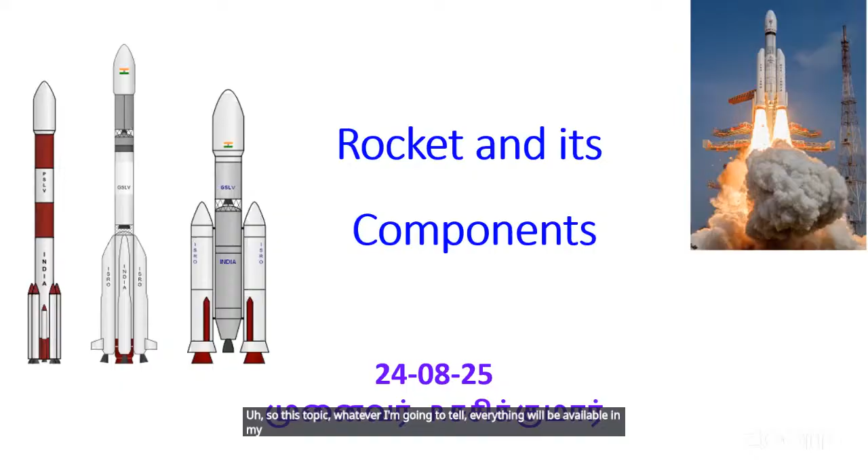Some two or three days back, he called me and asked, "Why can't you give one talk about rockets and its components?" I had some official engagements, then he said evening is also okay, so today 6 p.m. was fixed. As told, I have written almost 25 books in Tamil, 12 of them available in English, totally 40 books plus now, with a few in Malayalam and Kannada also. Whatever I am going to tell is available in my books in a very detailed way. So now we will learn about the components of a rocket.

Before that, we will understand some basic history and basic science behind rockets. So what is the principle of a rocket? Everybody studied Newton's third law of motion: for every action, there is an equal and opposite reaction. If you fill a balloon with air and then release its mouth, the air coming out creates a reaction force that moves the balloon. It moves in whatever direction you keep it.

Suppose you tie a rope between two points, put a straw on the rope and attach the balloon to it; the balloon will move in the direction the rope is tied. That is the concept. Similarly, if you burn a fuel and the exhaust gases are thrown out through a small opening called a nozzle, it creates a force, a thrust that pushes the rocket. That is the concept. There are liquid engines, solid engines, and so many things.

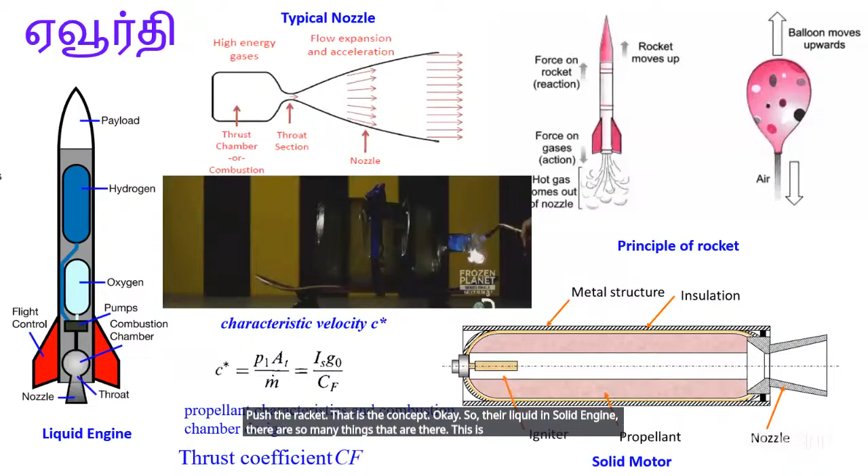This is the basic concept of rocket. In this line only we are going to study. So once I told fuel, there are different types of fuel available. Whatever we are extracting from the crude oil, all we call as a fuel.

Before this rocket story, there is a small history behind this. In the 19th century only, we found the crude oil. In the middle of the 19th century, we found how to extract different things from the crude oil. Those days, before petrol and diesel engines were discovered, people were using this crude oil to get only kerosene, and they were using kerosene lamps. That was the main purpose of this crude oil.

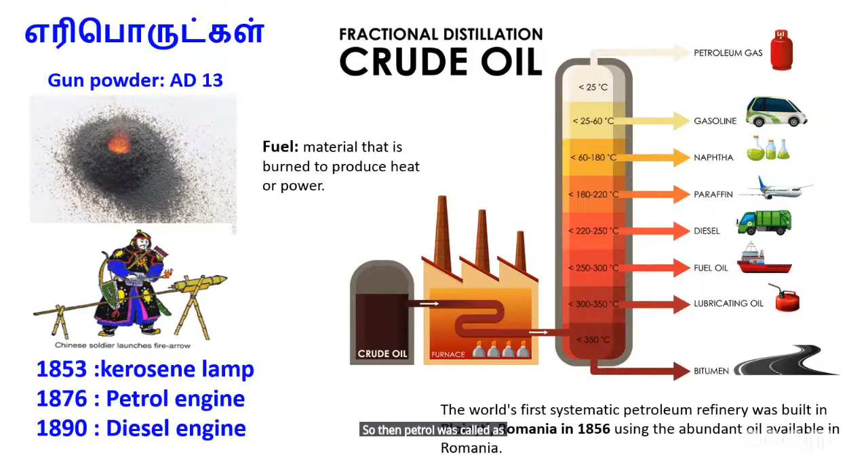Later they found the petrol engine in 1876 and the diesel engine in 1890, and it was a great opportunity for the crude oil extraction and the distillation of this crude oil. Then petrol was called black gold. From that day onwards, development started in all areas: how to use this energy, both petrol and diesel, and how to build very strong engines.

So we know that all are fuel, all are energy. Suppose you take two idlis in the morning, you get some fuel. If you take one chocolate, you also get energy. Each fuel has a different energy. For example, if you eat 1 kilo of Dairy Milk chocolate, you will get 22 megajoules. If you take 1 kg of banana, you will get only 4 to 5 megajoules of energy.

Rice also 5 megajoules. But the human body requires 10 megajoules per day, or in kilocalories, something like 2500 kilocalories. Like that, each propellant, each fuel we use, like coal, coke, or LPG, will give some energy. When the rocket uses this energy and converts it into kinetic energy, we will not get all the energy. When you fire the fuel, you get the exhaust gases.

This exhaust gas will be traveling through a... okay, my mouse is visible.

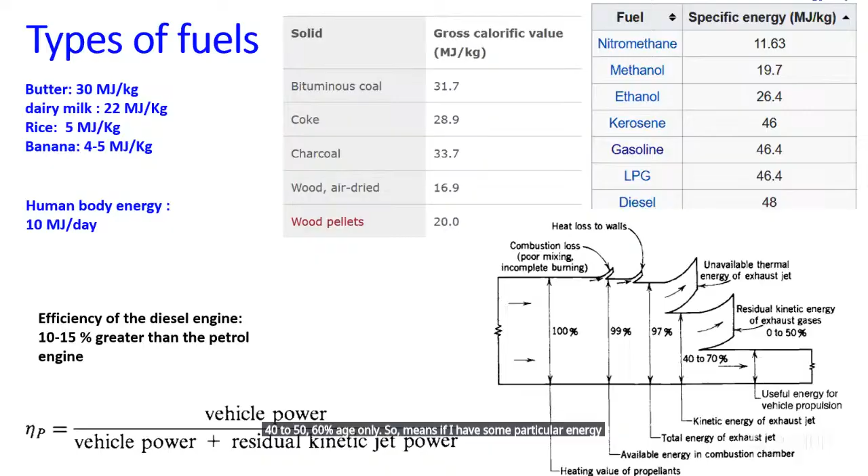Yeah, traveling through the nozzle. When it travels, some of the energy will be absorbed by heat losses to the walls. Before that, there will be combustion losses, that is poor mixing and incomplete burning. Then there will be unavailable thermal energy in the exhaust gas, so we will not get the full thermal energy. Then residual kinetic energy passes through. So effectively we will get only 40 to 70 percent. It means if I have some particular energy in my propellant, when it comes out, I will get hardly half of the energy.

But before that, what is fuel? What is propellant? That differentiation we should understand. To understand that, we will take the example of our aeroplane. An aeroplane travels in the air regime. If you go above the earth, till 30 kilometers altitude, 90 percent of the air is there. 99.9 percent of the air will be below 70 kilometers. If you cross 100 kilometers, it is called the Kármán line, where space starts.

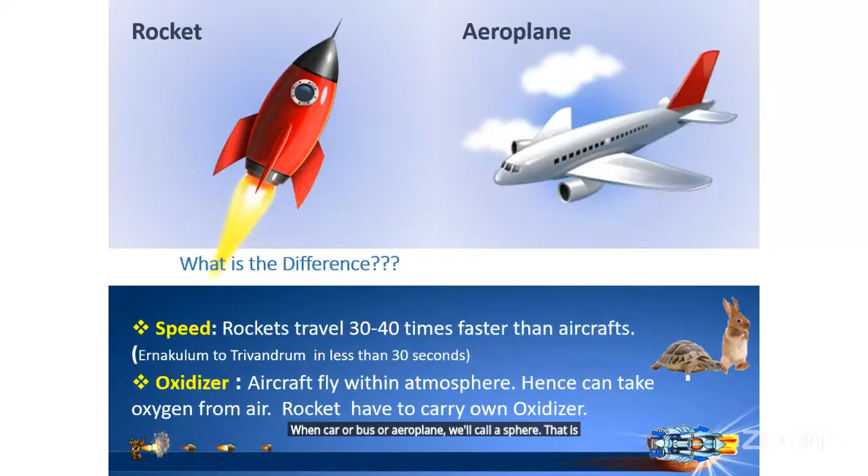So when you go out of air, into space, there is no air there. To burn any fuel, we need oxygen. So if the rocket goes out of the air regime into space, to fire the rocket fuel, we need oxygen. This fuel plus oxygen combination we call a propellant. For a rocket we call it a propellant; for a car, bus or aeroplane we call it a fuel. That is the difference. So when a rocket goes, along with the fuel it has to take oxidizer also. That is the message.

So come to our old story. Immediately petrol engine and diesel engine came. At that time the Wright brothers also started thinking of how to use this petrol engine and try to fly. So they designed the engine in 1903. The Wright brothers' engine was basically a petrol engine. With the help of that engine they were flying.

Later there was a gentleman called Robert Goddard, an American engineer. He also was trying to make a rocket using gasoline. In 1926 he made a rocket using this gasoline, the first rocket, which happened to be a liquid engine rocket. This liquid engine rocket rose almost 41 feet and traveled a total of 184 feet in 2.5 seconds. This is the first discovery of the flying rocket concept.

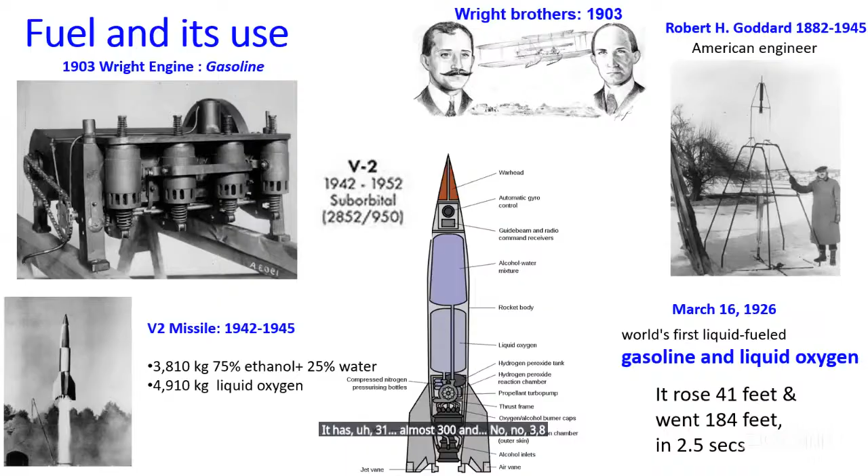Then the Second World War started in 1939. At that time Hitler thought they had to build a powerful rocket, so he made the V2 missile. That missile had a bigger capacity, traveling something like 300 kilometers plus. It had almost 3,800 kg of fuel as well as 4,900 kg of oxidizer. So the story goes like this.

During this period, before Goddard found this rocket, there is parallelly some more history happening. One is a famous person called Hermann Oberth. He originally proposed that when we want to fire a rocket, it has to go from Earth to some other planet. How do we have to fire it?

When we are near to the Earth, the rocket will be moving at higher speed. When it is away from the Earth, it will be moving at slower speed. So at slower speed, when you fire, we will not get higher energy. When we come near to the Earth - apogee, perigee - if we add the additional velocity, since half mv squared, we will get extra energy. This is what Oberth found.

But anyway, that was his PhD, and his PhD was not accepted in those days. In 1922 when he was telling this concept, people were unable to imagine it. His students only later developed the powerful rocket like the Saturn rocket, which took man to the moon. One of his students is Von Braun.

Wernher von Braun was originally in the German team developing the V2 missile. Later he moved to America for developing rockets.

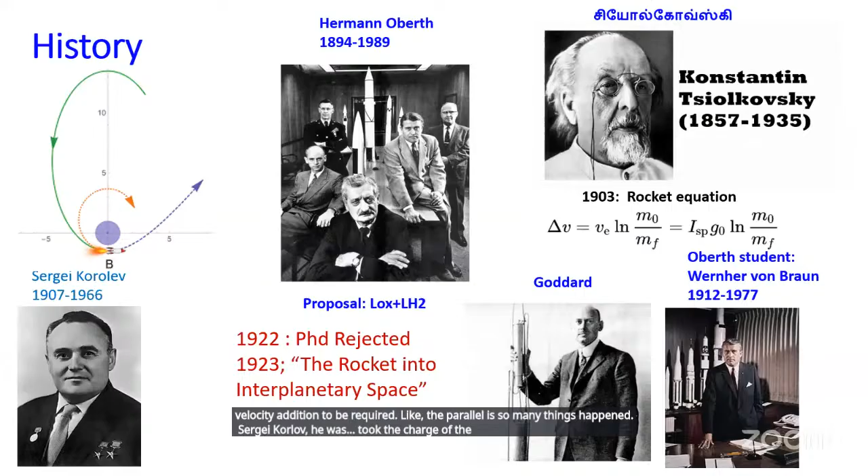Parallelly during this time, Tsiolkovsky found the rocket equation, showing how much velocity addition is required at each stage. So many things happened in parallel. Sergei Korolev took charge of the Russian space mission, so parallelly the rocket development was going on.

With this history, we will go to the rocket components. The first thing, as I already told, is we need a propellant. When fuel plus oxidizer is there, this combination is called a propellant. So a rocket has a propellant - to burn the fuel, we need oxidizer, and the rocket carries both things. Up to that, you may be clear.

So what is propellant - there are two types of propellant used in a rocket: one is liquid, the other is solid. Gaseous fuel, when highly pressurized and at low temperature, will be converted into liquid. So we can call it liquid and solid propellant.

Typical liquid propellants can be earth-storable. What does earth-storable mean? Take petrol - petrol is filled in a normal two-wheeler tank or car tank. We are not keeping any specified temperature limit; it can be stored at normal room temperature. These types of things are called earth-storable propellant: hydrogen peroxide, nitric acid, nitrogen tetroxide, everything.

So here both fuel and oxidizer will be stored here.

The second is cryogenic propellant. Cryogenic means when the fuel is stored at a temperature between minus 150 degrees Celsius to minus 273 degrees Celsius, we call it cryogenic propellant, like liquid oxygen and liquid hydrogen. Methane is also one type of propellant, but methane is stored at minus 161. If one is in the semi-cryogenic condition and one is at normal room temperature, then we call it semi-cryogenic. Otherwise it will be called earth-storable or cryogenic.

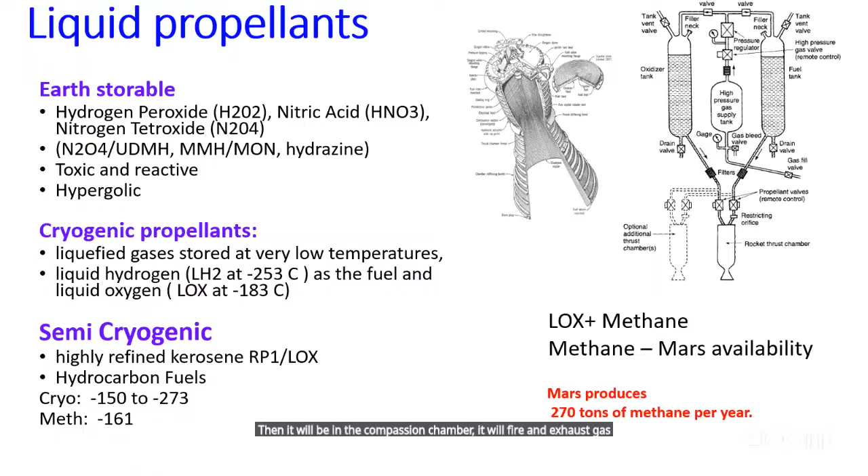If you come to solid propellant, unlike liquid, you have to prepare the fuel. First you take the fuel, then to burn it you need an oxidizer, which provides oxygen during firing. When you mix these two, they have to be joined together, bonded and bound, so a binder is added. Then you decide how fast it should fire, so additives are added for that. Everything is mixed together.

This mix is put in an oven at 60, 70, up to 100 degrees for a few hours, maybe even a few days, until you get a paste. Once mixed, you have to cast it, then heat it again in the oven, and you get a casted motor. So this will be solid.

Sometimes hybrid is also used, meaning fuel may be solid while the oxidizer is liquid. The oxidizer will be fired, touch the solid, and it will fire. But for bigger motors, hybrid has difficulty due to limitations, so we always use either solid or liquid only in larger systems.

This is the concept. What you are seeing here is a picture of the original motor planned in the Saturn rocket to take human beings to the moon. This has a 260-inch diameter solid motor, something like 6 meters. When this motor fires, you can think that 2,800 tons of thrust will be generated. That much powerful motor.

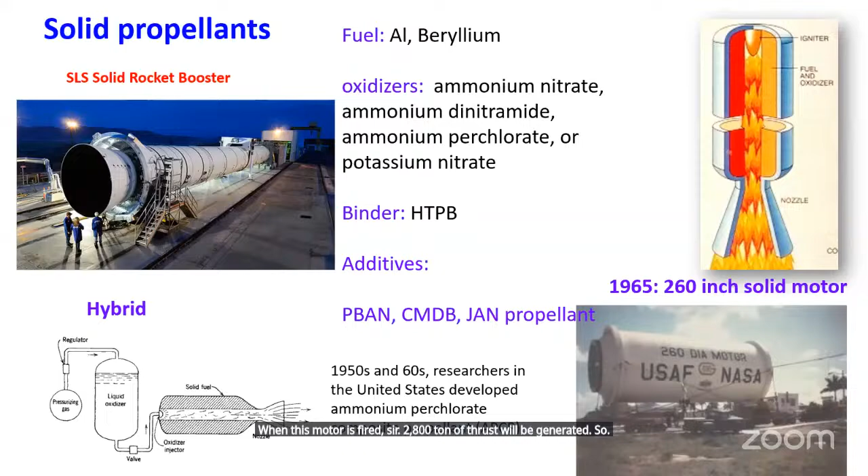Before going into how many components are in a rocket, we'll try to understand how many parts are there in your day-to-day life products.

Hope some of you are noting down what I'm telling with paper and pen. Just look at your pen. How many parts are there in your pen? I took the pen I used yesterday. This is a spring-loaded pen, there will be a spring, a top part, the nib, and the cap which I use to put in my pocket. So I have about 6-7 parts.

If you go to the bill of materials of a simple car, you'll see 5,000 to 20,000 parts. What parts go in there? Parts and inner parts - suppose I have one M8 screw, that screw could be used 10, 20, 30 times, so many parts will be there.

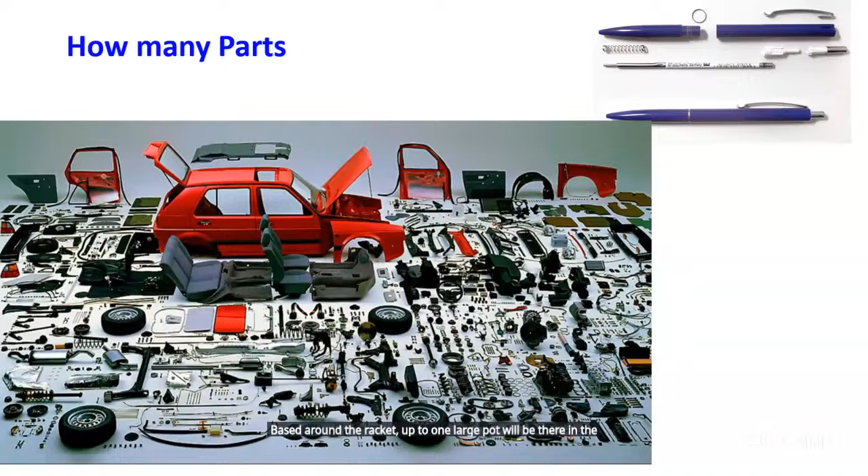In the same line, imagine a rocket - it will have so many parts, everything assembled together, finally connected by wire harnessing. Based on the rocket, up to 1 lakh parts will be there. Smaller rockets have fewer parts; as you go higher, it increases. Solid motors have fewer parts and liquid motors have more.

So then how will you design a rocket? For a rocket, the propellant is most important, consisting of fuel and oxidizer. By firing this propellant, we get exhaust gas, which moves through a nozzle, and due to Newton's law, we get a reaction force that pushes. So the idea is to fill as much fuel as possible in the rocket or rocket stages.

Assume you're going on a long trip, say someone sitting in Chennai going to Bombay or Delhi or Kashmir. One person buys a bag weighing 10 kg, and his luggage - dresses, makeup items, everything together - is only 5 kg. Another person brings a 1 kg cloth bag with the same 5 kg of clothes. So the first person carries 10 kg bag plus 5 kg luggage, totaling 15 kg, while the second person carries only a 1 kg bag.

So 5 kg is clothes, 5 plus 1, 6 kg only. They were taking the same luggage. One fellow taking a 6 kg weight, other fellow taking 15 kg weight. So which is optimal? 15 kg is unnecessary load. For carrying that, you may not carry, you have to ask somebody's help, you have to call labor to lift the item. Even aeroplane, they will charge you more.

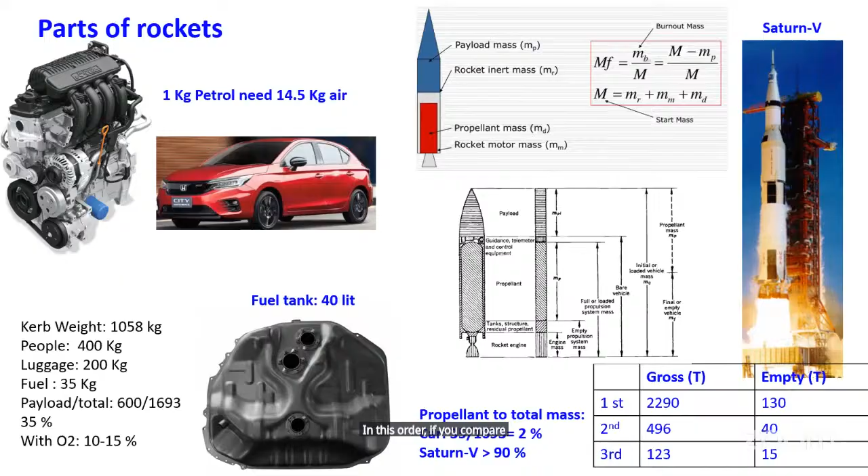But take the same thing for a car. If you take one typical car, the car weight is something like 1058 kg. Here, five people can sit, some 400 kg you can assume, luggage of 200 kg you can put, and 35 kg of fuel I can put. So payload to the total - the total weight will be car weight plus all people, 1693. So total weight it carries is 600. So the efficiency is 35%. Compared to the rocket, it will be still lesser. What I am trying to explain now is payload versus total mass of a rocket.

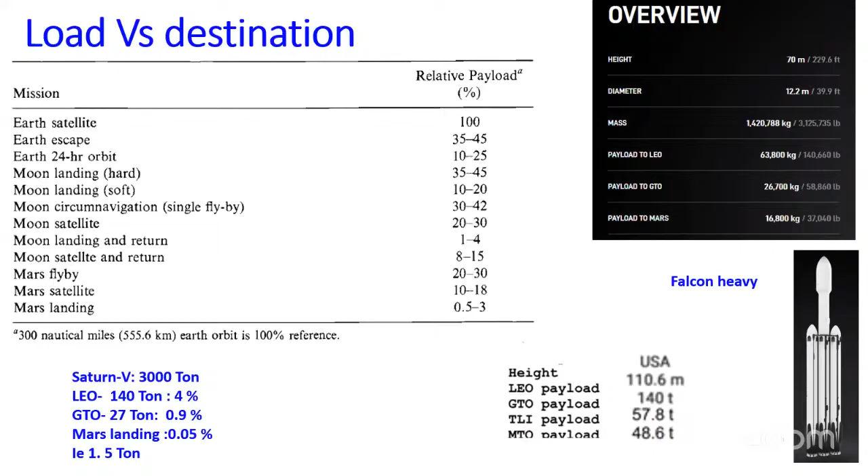So, hope I am audible.

Yes, sir. Okay. So now let's see how the stages are planned. Suppose you are going on a mountain trip and you have to walk for one full day. For that, morning breakfast, lunch, and evening snacks, everything you have to pack separately. Then after packing, you travel to the mountain. When you eat the food, the empty paper or cover will be there. Are we going to take that cover or simply throw it into the dustbin? We can carry it, but then unnecessary load will come. If you stored every chocolate or snack cover from the last 10 or 15 years in your house, it would be a huge load.

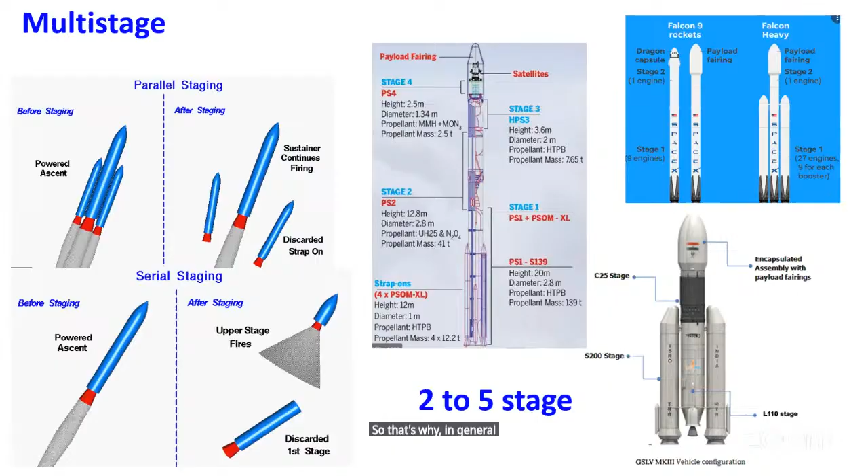Similarly, when a rocket goes up and up, it is designed in multiple stages. Once a stage is over, carrying that stage is an unnecessary burden for the rocket, so that stage will be separated from the main thing. When you separate it, the next stage will take care. Ideally, if my rocket has n stages, say 100 stages, removing each stage after it burns would be an advantage. But there is a practical difficulty: assembling more stages. That's why, in general, rockets have a minimum of 2 stages and a maximum of 5 stages. That is the optimal thing.

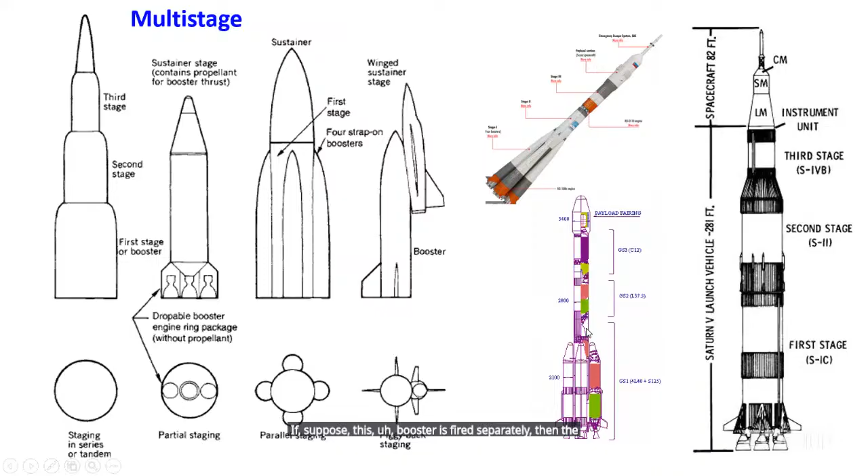Then, how stage numbering is given: you can see the main booster. I have put the same GSLV rocket. To support this main booster, I will give strap-ons. The strap-ons give force to the main booster. When it is put like this, we call the strap-ons the zeroth stage, and the other one we call the main booster. If the booster is fired separately, then the main booster, then it is called first stage, second stage, like that. You can see this in some rockets.

Okay. So now the rocket goes and my stage is burnt. I don't want that stage, so I want to remove the burnt stages. What am I supposed to do? Suppose you are splitting two objects. You are moving in a bus, and before the bus stops, you want to jump from the bus. What will happen? The bus is going at 2-3 kilometer speed, but you and the bus have the same momentum. When you jump, since your body mass is less, you will move ahead of the bus. That is called momentum, mass into velocity. Like when one big ball hits a small ball, the small ball moves faster.

Similarly, in a moving rocket, if you remove the stage, the removed part will travel at a faster speed than the main rocket. It will go and hit it, so this you should avoid. You see here the S200 after separation and how it is done. For that, we give a separation motor, which we call a retro motor.

Okay. So this retro motor will fire in the opposite direction or sideways. It will remove the burnt stages so they are not hitting the main motor. Like the different motors you can see: retro 1, retro 2, separation, like that you can see.

Then the second: suppose you have a water bottle, your bottle is full, then you take one sip. So the top 100 ml is empty. That volume is called ullage volume. When the rocket moves, you will have this ullage volume in the liquid engine.

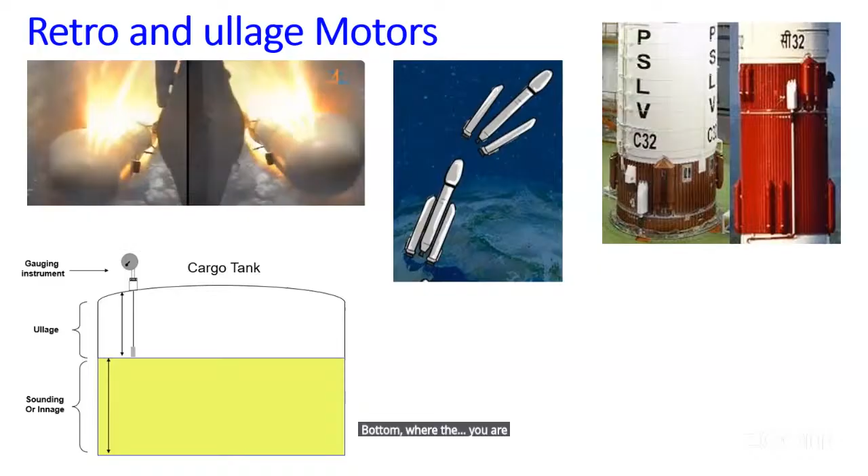So when this particular stage is not firing and some other stage is firing, whatever fuel or oxidizer is there will move upwards due to the rocket movement. So you will have an empty space at the bottom. But prior to firing this particular liquid stage, we have to bring this fuel to the bottom where your engine outlet is connected. So for that you will fire some ullage motor also.

That is also one component. To simply explain once again: there is a fuel and oxidizer, both will be pumped to the combustion chamber. Once it is in the combustion chamber, it will fire and go out. How much thrust it gets will be proportional to how much mass we are firing and the velocity at which this exhaust gas goes. In some cases there will be a pressure difference between the exit and the atmosphere, so that also will give a small thrust.

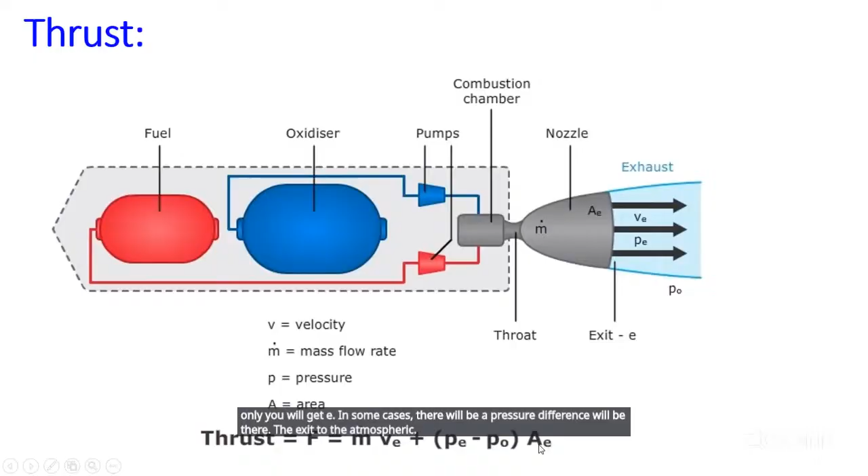Then one question will come: how are these fuels rated? When you buy a car or a bike, they tell you the mileage. Some car gives 10 kilometers, some car gives 20 kilometers mileage. Like that, the term we define for rocket fuel is called specific impulse.

What specific impulse says is, suppose I give 1 unit of fuel, meaning propellant. Suppose I give 1 kg of propellant to you, it has to produce 1 kg of thrust. How long it produces this 1 kg of thrust is given by the specific impulse. Suppose I give 1 kg of fuel and it generates 1 kg of force for 200 seconds, then my specific impulse is 200 seconds.

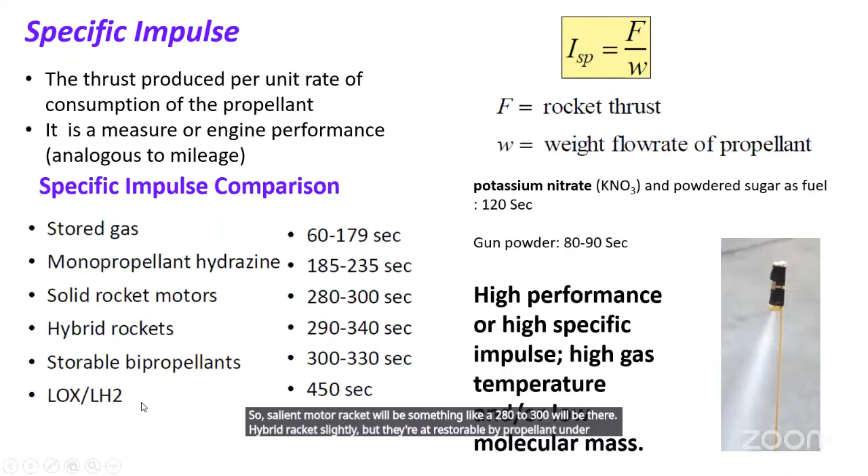That is the idea. So a solid motor rocket will be something like 280 to 300. Hybrid rocket is slightly better. Earth storable bipropellants are 300 to 330. Then cryogenic will be 450. Like that, different numbers are there. Anyway, solid, liquid, everything I told. Solid will be simple in design, reliable, long storage, but it cannot be shut down once it is fired.

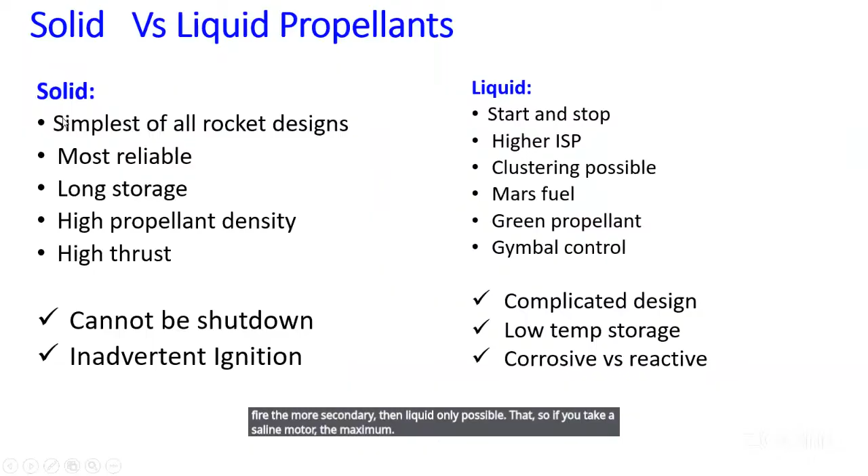Okay. But with liquid, start and stop is possible, and higher ISP. If you want to fire for more seconds, then only liquid is possible. That's why if you take a solid motor, the maximum action time will be 2 minutes only, but liquid up to 10 minutes, 11 minutes is also possible. These are all the advantages.

Okay. In a solid motor, how do you want to burn it? When the rocket starts from the earth, it has to travel slowly in the atmospheric region. On the earth it will start from zero velocity. Anyway, it will have the earth's rotational velocity, something like 1,600 kilometers per hour. When it goes into the atmosphere, it will go to 5,000, 10,000 like that.

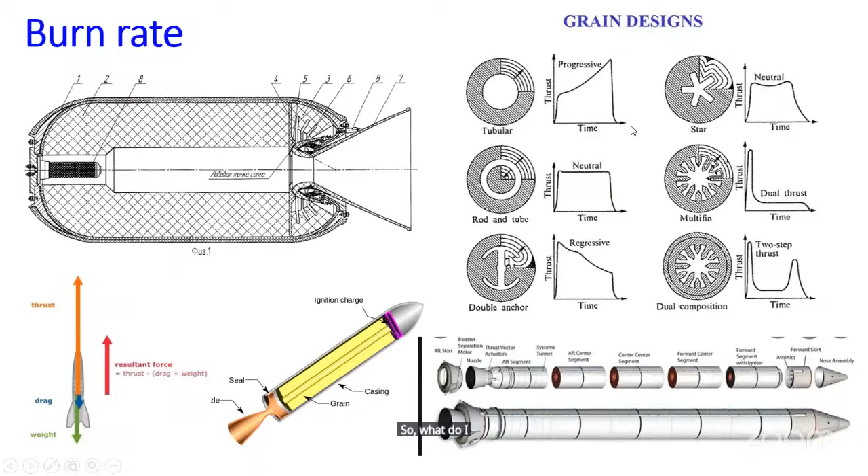When it is going through the thick atmosphere, the friction force will be high, so it will go slowly. Once it crosses the atmospheric region, it will travel faster. That's why you can see that different profile. When I travel in the atmosphere, I have to travel slowly. When I am crossing the atmosphere, I can go faster. So what way I have to go and how much thrust I need will be decided by the burn rate of the solid propellant. In a liquid engine it is not required. They can simply pump the liquid and oxygen accordingly.

That will be decided. One of the main parts of this rocket is the nozzle. What the nozzle does is, when you fire a propellant, you get exhaust gas. Instead of simply sending the exhaust gas out like our balloon story, you compress the exhaust gas to Mach number 1. What is Mach number 1? Our speed of sound. Speed of sound we can take roughly as 1200 kilometers per hour. Till that you compress it, then after that you have to expand.

You are seeing here now, still you have to compress and you have to expand. Then the efficiency of this will be increased. By using this, we can increase 40 to 70% of thrust. To do this, the nozzles are put. There will be different types of nozzle. One may be the submerged nozzle, another will be the simple conical nozzle. You can tilt the nozzle sometimes. So many designs are there.

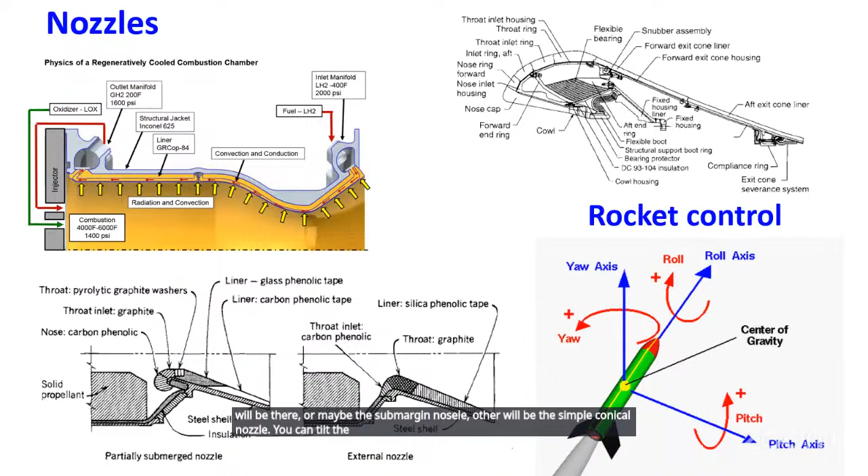Then where will the brain of a rocket be sitting? The rocket has to control itself. It is a closed loop guidance. When you give an input, what speed I will go, where I will go and all the data, there will be n number of sensors put on different parts of the rocket. At what speed it is moving, whether it is going in the right direction, whether I have to gimbal the rocket, everything will be decided by the electronics sitting in the rocket.

It will be put on the top of the rocket. It is called the equipment bay. There all the control system will be put. That is what we are calling the brain of a rocket. Sometimes in the individual stages also we will give a smaller control system. So this will control the full rocket.

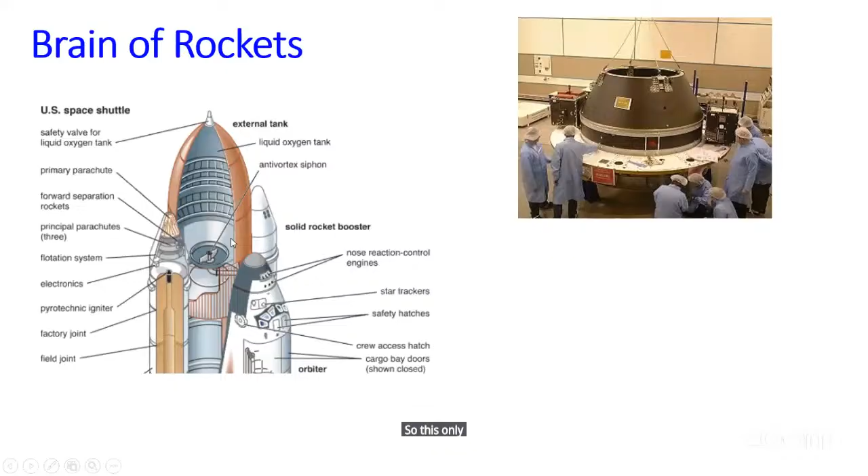So these will absorb. When you go inside a cinema theater, you will hear a very nice quality of sound of whatever movie is playing. Or if you go inside a car and close all the windows, it will be calm. Engine noise you will not hear, or outside road sound. These all are acoustic protection systems. Similar thing you can see.

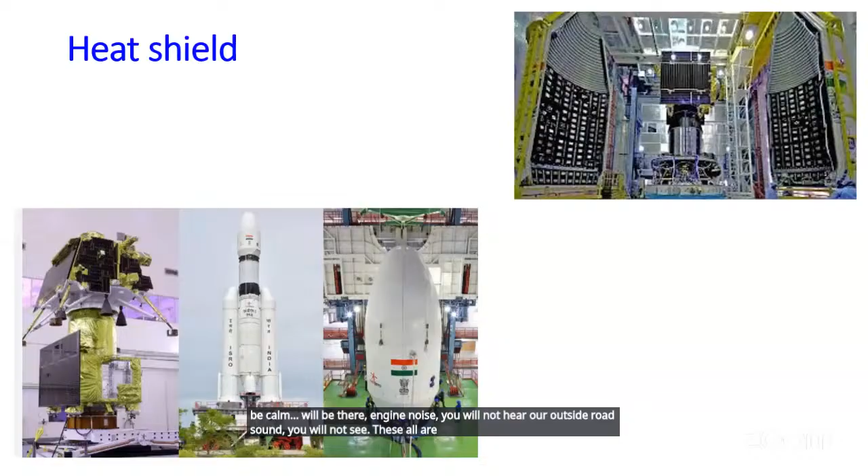When the rocket goes, the rocket has to be moved in the direction where it has to move. Just think of a big ship, how the ship is moved. A ship will have a rudder. A propeller will be there, propelling continuously. Before that, a rudder will be there. What will this rudder do? It will give the direction where I should move the ship, the opposite direction. This concept is applicable in a rocket also, but in a different way.

Assume that there is a pipe and water is coming. You are just blowing on the water. What will happen? The direction of flow of this pipe water will change. This is called secondary thrust vector control. When the exhaust gases are going in a nozzle, you put one high pressure stream of liquid. If you pump that in, the direction of flow can be changed. So that will change the rocket. This is one type.

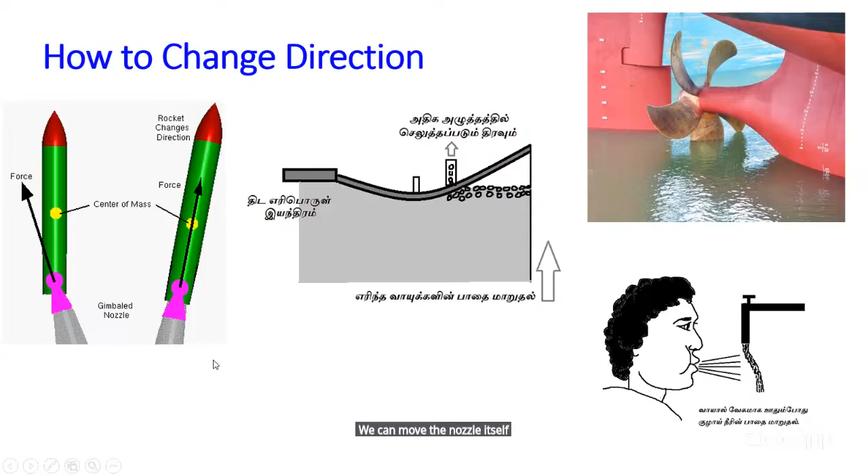Second type is the combustion chamber. In the case of a liquid engine, you can move the combustion chamber itself. That is called gimbal. You move the combustion chamber, then the direction of flow will change. Accordingly, rocket movement will happen. Otherwise, in a solid motor, we can move the nozzle itself. There we will put an actuator. The actuator will move, then the flow will be changed, and it will go like that.

Then different pressure vessels will be there. One of the feed systems is called the pressure fed system. Say I have a fuel tank and an oxidizer tank. I have to make sure that the oxidizer and fuel come to the combustion chamber at the required flow rate. Next time when you go on a train, the new LHB bogie, you see that if you go to the wash basin or bathroom, water will be flowing. But the funny part is the water tank is not like in our house.

Now a house will have the water tank on the rooftop or the highest point in your multi-story building. But in the train, the water tank is at the bottom of the bogie where you are sleeping, underneath your sleeper coach. But how is that water coming from there to your wash basin? The wash basin is lifted up.

Similarly, in a car the fuel tank is at the bottom, and it is coming to the top. For that we have one fuel pump. When running, the fuel pump will bring it. Similar to that, in this rocket we will have one pressurization unit. The high pressure gas will be stored. That line will be given to both the fuel tank and oxidizer tank. It will always maintain positive pressure, which ensures flow is coming. So that's why you're seeing these gas bottles.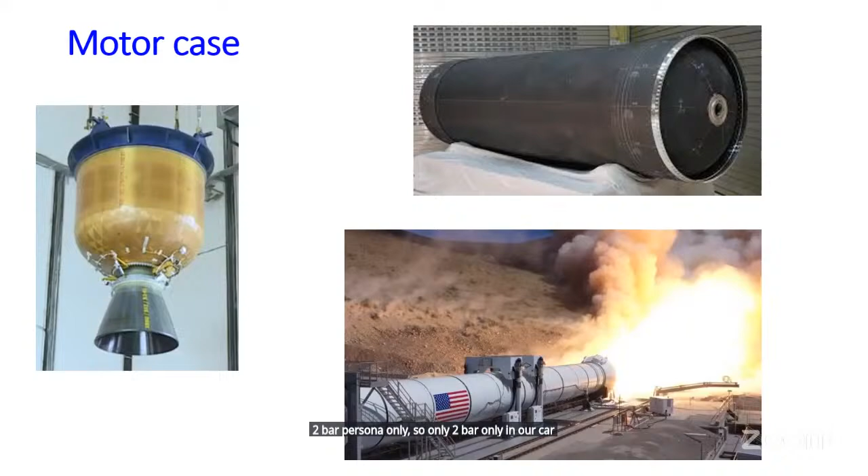How much is 66 bar? 66 means 66 times our atmospheric pressure. If you take our pressure cooker, sometimes in your house there may be a failure in the whistle, then the lid of the cooker may be lifted. Inside the cooker the pressure maintained is only 1.7 bar. Or if you take your cycle or a car, in the car we will fill 25 psi, that corresponds to only 2 bar pressure. So only 2 bar in our car, 4 to 5 bar in a bus, but here it is something like 60 bar. So that much pressure will come, and for that it is designed.

As I told earlier, in a pressure fed system we have a gas bottle, but if you have a bigger and bigger liquid engine, pressure fed will not work. We should have a separate pump. That pump we call a turbo pump. Take the same LVM3 rocket here: this middle stage is called the L110 stage. L110 means liquid, 110 ton of propellant. That much propellant is stored here. Roughly this stage will operate for 200 seconds. So in 200 seconds, I am consuming 110 ton of propellant, meaning each second I am consuming 550 kg of propellant.

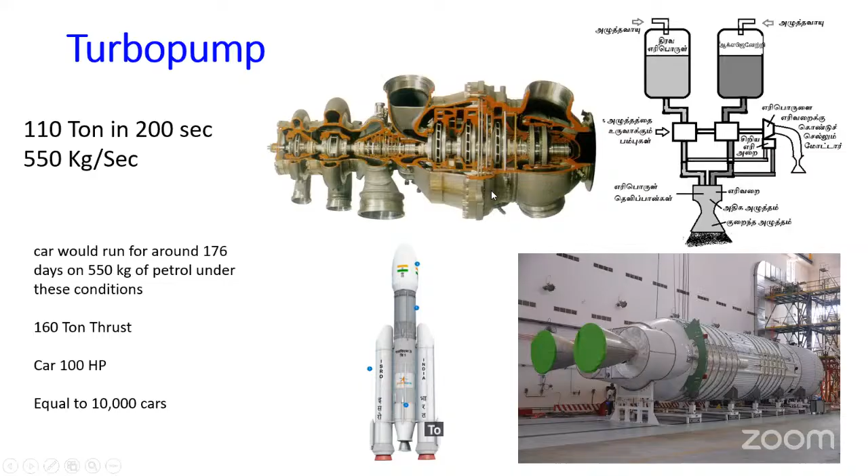Even our house tap cannot consume that. We have only a 1000 liter water tank that will last for 2 days. A car has a 30 liter, 40 liter tank. If I give 550 liters of fuel to a car, the car will run almost half a year, 176 days. This much fuel I need every second. So one L110 stage is something equal to 10,000 cars. For that I need a powerful pump. That is what we call a turbo pump. Okay. So components like that are also there.

When the rocket goes, we should know where am I and where I am going. Suppose the rocket has a closed loop control. It has to decide its own path. It has to tilt the nozzle, and in some cases thrust control is also there. For that, it should know where it is and where it goes. For that, two main things are there. One is the gyroscope. The gyroscope will give an idea where it is in three-dimensional space, what rotation it is going through, which direction it is going, X, Y, Z, everything it will measure. Then it will give feedback that will be used.

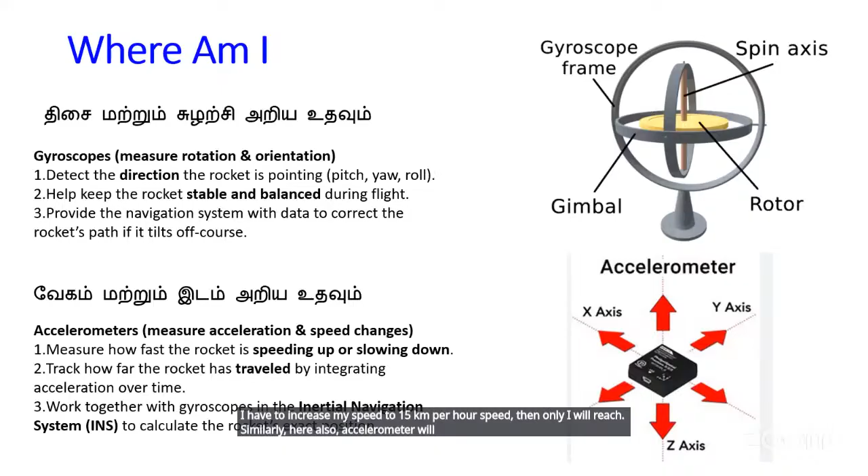Similarly, one more thing called the accelerometer. So what speed is it going? Suppose you are going on a cycle from your house to school, and your house to school is 5 kilometers. You are going at 10 kilometers per hour, but you have to reach slightly faster. Then you should know that you are going at 10 kilometers per hour, and I have to increase my speed to 15 kilometers per hour. Only then will I reach. Similarly, here the accelerometer will give where I am, where I reached in another 1 second, what speed I am going, everything.

Earlier, I told about the heat shield. So the heat shield is protecting the environment. There you can see one thermal protection system, this brown color you are seeing now. So when the rocket goes, this is the C60 rocket, I think you can see the image. Next time when you see the video, see carefully: when it goes in the atmosphere, it will be like this. When it goes to the thin atmosphere, the heat coverage, whatever comes, you can see that one fog is covered on the heat shield. So the components are designed for a particular temperature.

If you buy any item, say your phone or a toy or whatever, there will be one rider: keep this in a cold place, keep it at 25 degrees to 40 degrees, don't keep it near the stove, like that. That means the chips, the metallic body, whatever you call it, are designed to operate in a particular temperature. So the heat shield is made up of, say, composite or metal. That will be designed for operating in a particular temperature, say 60 degrees, 70 degrees.

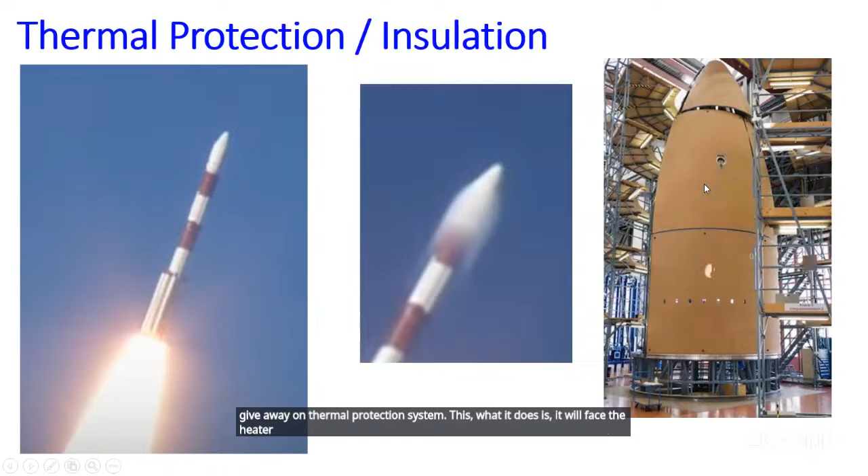When temperature increases due to air friction, the ability of this material will come down. To avoid that, you have to give a thermal protection system. What it does is it will face the heat. It will make sure that the components are not affected by the heat. Like this, different parts of a rocket will have it.

Then the second missile, it will not go to space. It will just travel only in the atmospheric region. It will have a powerful jet engine. It will travel whatever way it is guided. It will go at a slower speed, but it will have a lot of maneuverability. So that is the difference. For the ballistic missile, whatever rocket components I told are applicable. Okay, with this I will give the main stages of two rockets and we will conclude.

This is a GSLV. GSLV has three stages. The first stage we call GS1. This is S139, meaning a solid motor with 139 ton of propellant. The fuel is HTPB based. The thrust it will generate is 480 ton. It will operate for 100 seconds.

The second stage, what we see here, is a liquid engine called the Vikas engine. This strap-on is also a Vikas engine. It is L40 we call it, 40 ton of propellant. Here also almost 40 ton you can say. This is the liquid stage. This also will give a thrust of something like 80 ton. It will operate for 150 seconds.

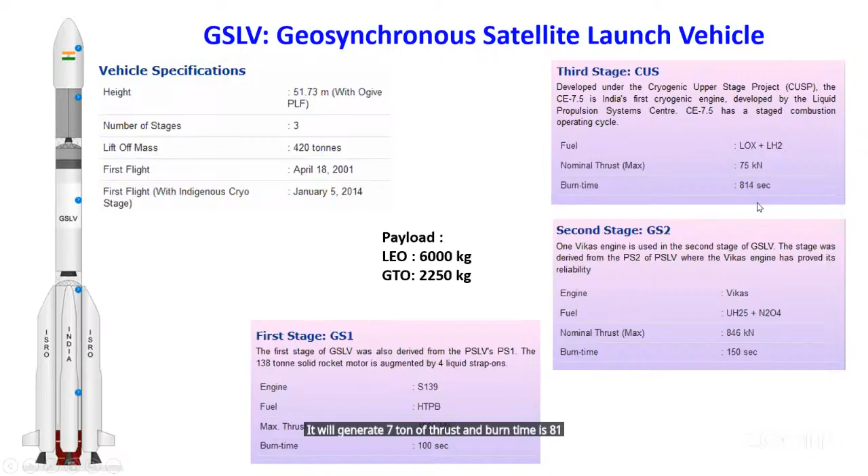Similarly, LVM3, which took the Chandrayaan mission to the moon. This is also three stage. First, these strap-ons are solid motors. This is 200 ton propellant. The main is L110, which I already told. Then the third stage is cryogenic, that is 25 ton of propellant. You can see further details in our ISRO website.

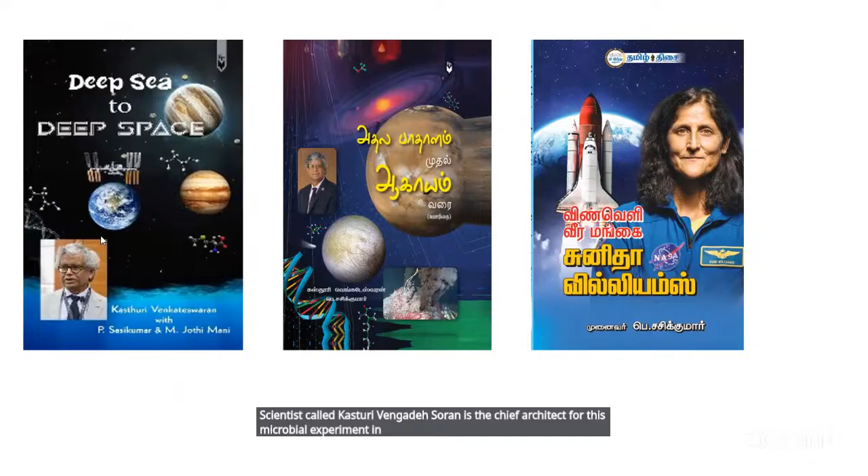Recently I have written one more book in Tamil about Sunita Williams' trip. There also you find whatever rocket story and all. Then I had one more opportunity to draft the biography of a NASA scientist called Kasturi Venkateswaran. He is the chief architect for the microbial experiment in JPL. He retired now, so you will find his interesting story of how these microbes are helping astronauts and day-to-day life. All those things he covered. This book in English is available as Deep Sea to Deep Space.

Other than this, a number of books are there. You can find all my 40 books. I have just given a list. All book details you can find on this particular website. So you can go there. Whatever content also will be given in that book, so whatever you want to know, you can read. Okay, Google it.

I'm just coming to the last slide. If any question is there, we will go to the question answer session. Hope it's clear. All students noted down whatever I told. I just told it in a very fast way. You can go there, read these books, so you will get a lot of idea of what exactly I told.

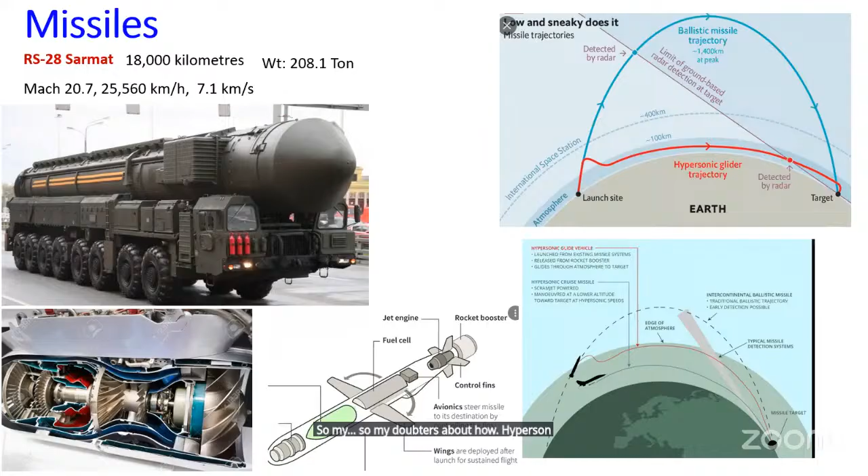My doubt is about hypersonic glider trajectory. If hypersonic missiles are going at a low altitude, they may face a denser amount of air, so it is better to have long-guided ballistic missiles which have a less fuel option. So then why do they choose hypersonic? Accuracy will not be there with ballistic missiles. A ballistic missile is like dropping a ball from the 10th floor of your apartment, it will go the way you dropped it, that way only. But a cruise missile will give a trajectory - if a flying aeroplane is there that you want to chase, you have to give control accordingly. When the aeroplane moves with some speed, say 3000 kilometer per hour, this missile also will move, adjust, and go and hit it.

Okay, today's talk is on launch vehicles, not on missiles. I have given a final slide to differentiate between launch vehicle and missile. I will appreciate if questions are specific to launch vehicles, that will be good.